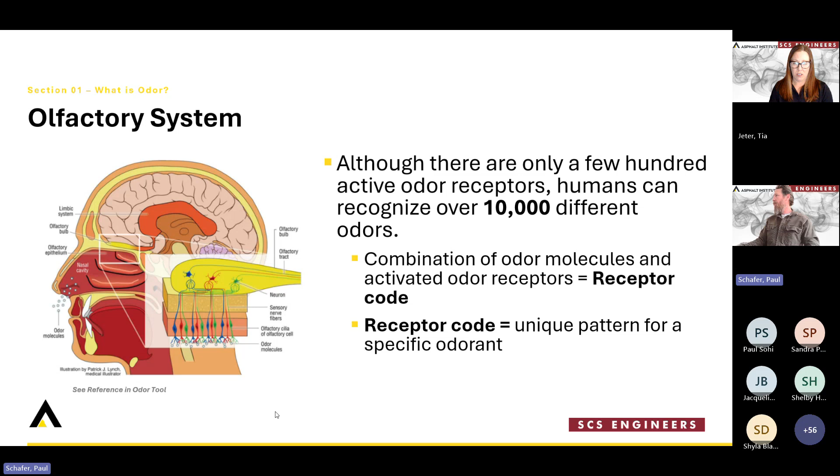So, what conditions are necessary for odor perception to occur? For one, there needs to be an odor-generating source present. The odorant molecule is generally a volatile compound. The odorant's molecular weight is less than 300 Daltons. This is some detail you probably won't need, but we're just providing that information. This information is in the tool. The odorant's vapor pressure is greater than 0.01 kilopascals at 20 degrees Celsius, and the odor molecule has a moderate to high hydrophobicity, so somewhat hydrophobic.

All right, so the mixture effect. So what happens when different odoriferous compounds are present at the same time?

So some olfactory neurons only respond when two or more odorants are present. For example, compound A, no odor detected. Compound B, no odor, but when you have compound A and B together at the same time, an odor is perceived. So that's considered the mixture effect.

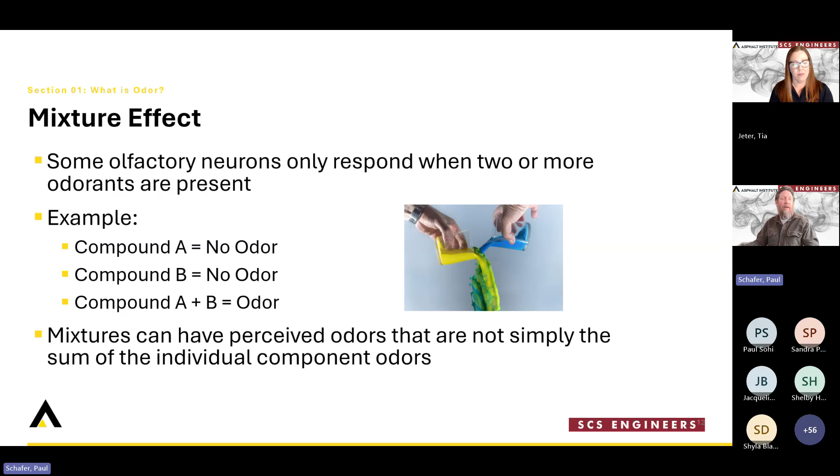Mixtures can have perceived odors that are not simply the sum of the individual components of odors. So some mixtures can actually inhibit the perception of other odors, and some mixtures of compounds can actually increase the perception, or the sum of the parts is greater than the individual compounds on their own.

Okay, so how do we define odor? The main ways we define odor are within this table: odor characterization parameters. First off, concentration, a very important parameter regarding odor. Odor concentration is quantified by determining the amount of dilution required to bring an odorous air sample to a detection threshold. This is often called the odor detection threshold of a specific compound. The dilution to threshold of an air sample defines its odor concentration.

Intensity. Odor intensity refers to the perceived strength of the odor. A quantitative measurement of intensity requires comparison of the odor air to a standard. Typically n-butanol in odor-free air is the standard. A qualitative scale can also be used to describe intensity, with 0 being not perceptible to 6 being extremely strong.

Odor character. Odor character describes what the substance smells like. For example, fishy, hay, nutty oil, creosote, turpentine, all of these things are descriptions of odor character. Hedonic tone, essentially, whether or not it's offensive, the degree of unpleasantness of an odor.

It's a subjective judgment. Certain people, my wife, for example, love the smell of gasoline. Some people do not. We even have an employee within SCS that I work with directly who loves the smell of hydrogen sulfide. I think she's nuts, but she likes it.

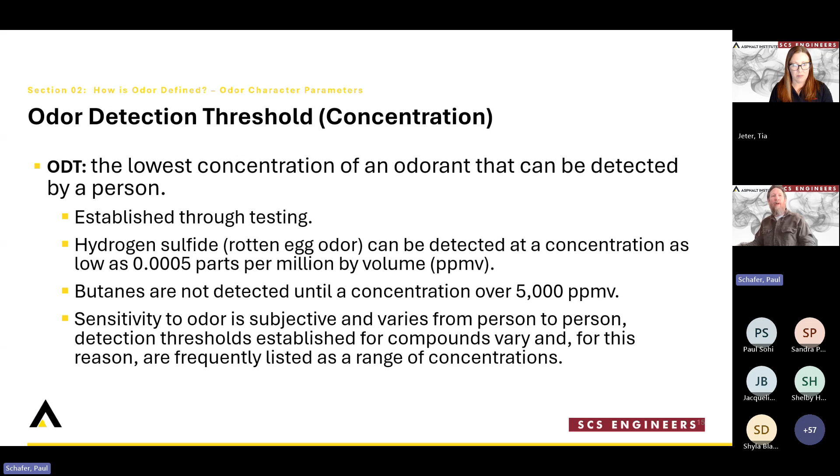Butanes are not detected generally until a concentration over 5,000 parts per million by volume. So certain compounds have significantly lower odor detection thresholds than others. Sensitivity to odor is subjective and varies from person to person. Detection thresholds established for compounds vary, and for this reason are frequently listed as a range of concentrations.

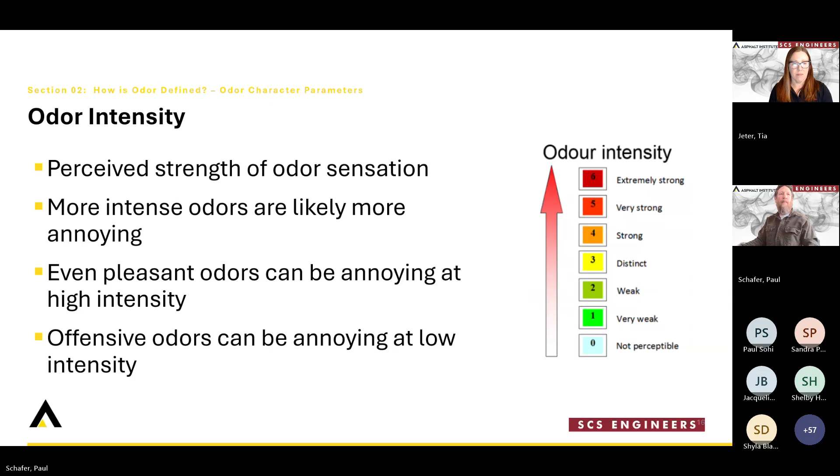So odor intensity, essentially the perceived strength of an odor sensation, is often described as 0 being not perceptible to 6 extremely strong. More intense odors are likely more annoying. Even pleasant odors can be annoying at high intensity, and offensive odors can be annoying at low intensity. So it's a combination of odor character as well as odor concentration that's in play.

Odor character, essentially what does the substance smell like? There are all sorts of categories of smells. The ASTM data series DS61 provides profiles of 180 different chemicals. Examples of descriptors, like we discussed before: fishy, hay, nutty. So this is a way of trying to establish relationships between potentially a source and the character being perceived downwind.

Hedonic tone, essentially how pleasant or unpleasant it is. It's influenced by subjective experience, like we discussed before, how frequent the occurrence is, odor character, odor intensity, and duration.

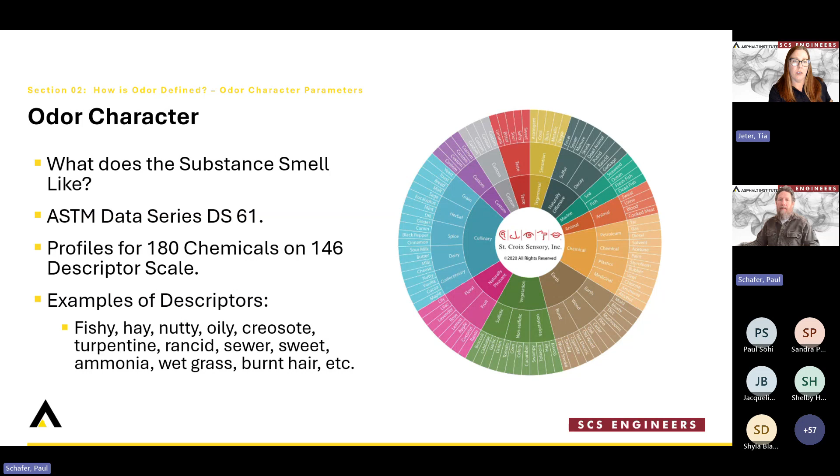Hey, Paul. Yep. I don't think your slide moved forward. Oh, shoot. Sorry. Thank you. You're good. There we go.

Hedonic tone. So it's influenced by subjective experience, odor intensity, and duration. Hedonic tone is influenced by all the other parameters and characteristics that we discussed. Some odors that are pleasant at low concentration can be perceived as not okay at high concentration. Baked bread smells good at low concentration, but some of the chemicals in baked bread smell essentially like vomit at high concentration. So that's an example of how hedonic tone can change with concentration.

Okay, so we're going to discuss some of the chemistry of asphalt odors now. What are the chemicals related to asphalt odors that can cause odor events? Hydrocarbons are one class of compounds, and the examples are on the right-hand side of the table. Oxygenates, including aldehydes, ketones, and esters. Nitrogen compounds: amines, nitriles. Sulfur compounds: mercaptans, thioethers, carbonyl sulfide.

Sulfur compounds generally have very, very low odor detection thresholds. Halogenated compounds: aliphatic compounds, chlorides, bromides. And inorganics. Hydrogen sulfide is an example of an inorganic. H2S has a very low odor detection threshold, able to be detected at very low concentrations.

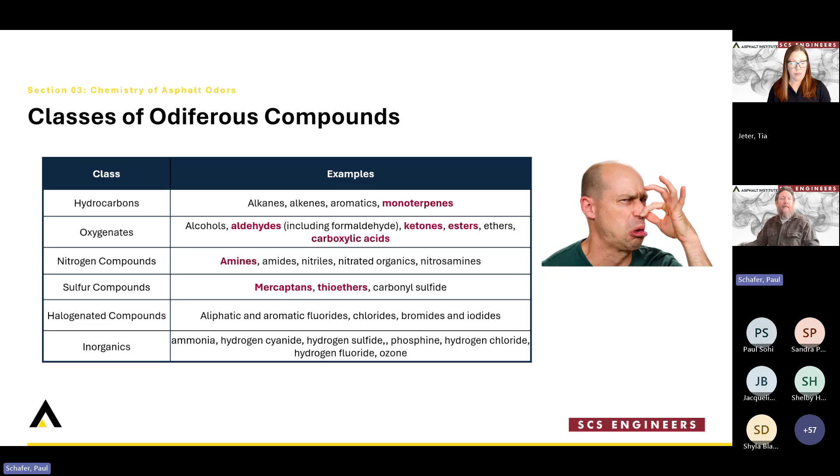Okay, so asphalt odors, some of the data we evaluated in development of the tools. So we looked at quantification of potentially odorous volatile organic compounds from asphalt binders using headspace. So Mr. Lang and his group put together a really quality description of asphalt emissions, and we utilized a bunch of that data, and we combined it with odor detection thresholds to determine which of the compounds have the highest potential relative to asphalt sources for generating odor and odor events. So what compounds had high odor potential?

For one, sulfur-containing compounds. So butane thiol, carbon disulfide, and you notice how we provide an odor detection threshold range, as well as the odor character related to that specific compound. The reason that we provided a range is that depending on the test method and the source, from ACGIH, American Conference of Governmental Industrial Hygienists, to EPA, 3M, various types of journals, you can find large ranges of odor detection thresholds specific to a compound.

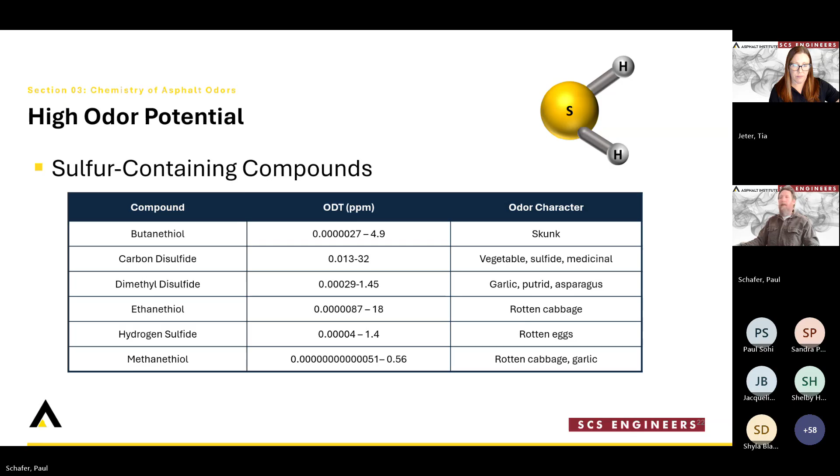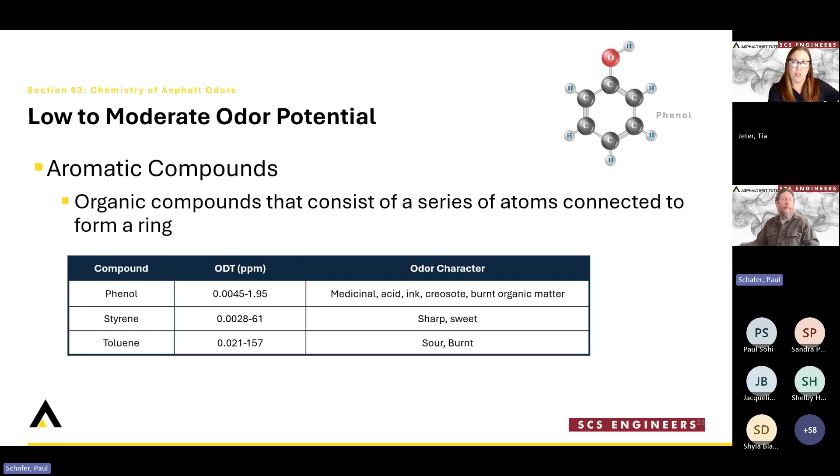All right, so aromatic compounds, low to moderate odor potential: phenol, styrene, and toluene. Some are listed at fairly low odor detection thresholds, but in general, compared to thiols, mercaptans, and sulfonated compounds, a much more moderate to low odor potential related to these compounds. And then the compounds that may exist in high quantities, but potentially aren't a major source of your odor profile or what would cause odor events, are 1,3-butadienes or aliphatic compounds and fluorinated compounds. Essentially because these compounds have significantly higher odor detection thresholds than compounds listed before.

So potential asphalt odor sources, and I believe Tia, you're taking over from here. Yes. So I will touch base on a few of the common sources we find in the asphalt industry where you could maybe produce odors. So the first one we have here is your asphalt loading, unloading, and storage.

So as this cartoon depicts, as you load liquid into a vessel, whether that's a storage tank or maybe you're loading into a truck, you're displacing the vapors that are in that vessel and pushing them out of some sort of vent, could go on a stack. Wherever those vapors are emitted is a potential source of odors that will be released to the atmosphere. We have seen in some cases these storage tanks, especially in a big facility, are controlled by maybe a flare for some facilities like refineries. Maybe it's a mist eliminator. So there are certain controls that can reduce these odors out of these stacks. Or in some cases, it could just be an open vent.

We did testing at a facility where they were actually unloading a truck of hot asphalt. And in the process, before they start pumping out of the truck, they open a vent on the truck. That way you avoid pulling a vacuum and crushing it like a can when you turn your pump on. And there are 2 to 5 minutes between when that vent is opened before the pump starts that you have hot asphalt and visible fumes and odors that can escape through that vent. So these are sources that sometimes are controlled, sometimes they're not. Typically there'll be an intermittent odor source. So it really depends upon the frequency you're receiving trucks or loading to a tank.

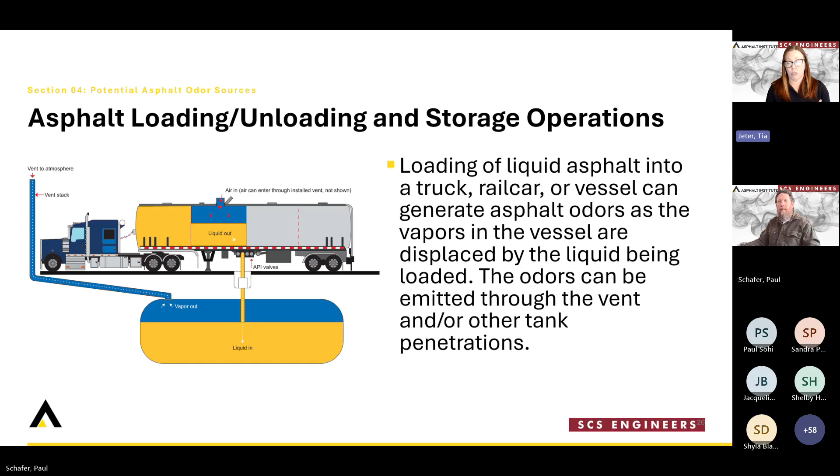Asphalt mixers. So most of you are familiar with this industry. These mixers are used to combine liquid asphalt with many types of different compounds. It could be aggregates, for paving. It could be additives to make a different type of coating, recycled materials. But generally in these mixers, you're tumbling around the asphalt, agitating it at pretty high temperatures, which does create the potential for asphalt fumes or odors.

These are common at hot mix asphalt plants, cements and coating facilities, shingle production plants, terminals. They all may have these mixers there. Again, these may commonly be going through some sort of an air pollution control device. And in some cases, if that air pollution control uses a form of incineration or like a thermal oxidizer, you could get fairly good odor control on this source. If it's a mist eliminator, you may not get as good of an odor control. And if it's not controlled, then it's definitely going to be a pretty strong source of odors.

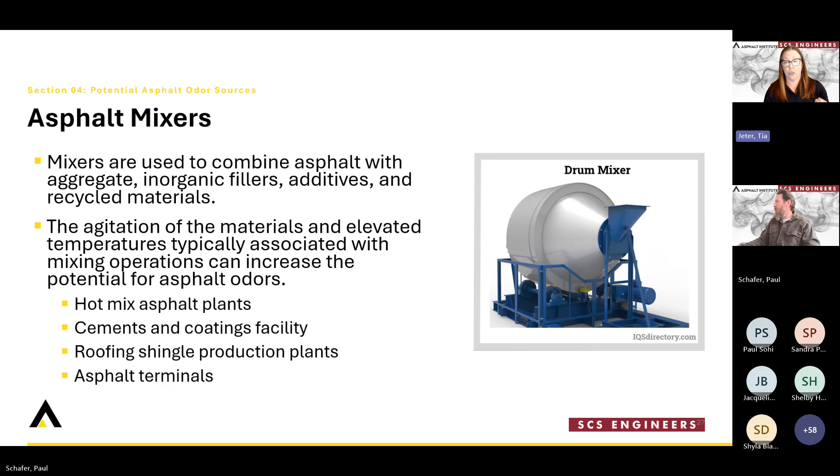Asphalt saturators and coaters. So coaters, this is where you're applying the asphalt to a substrate, typically a fiberglass mat. Frequently you'll see these at shingle production lines. You do have kind of an open vat of hot asphalt, which has a potential to generate fumes, which would release odors. Sometimes the issue with these coaters, it can be hard to enclose them completely and try to capture those emissions and control them in some way. This is kind of inhibited because you have to get that substrate, it has to go in and out of the coater. So totally enclosing that can be challenging.

So sometimes these coaters are a source of our fugitive odors. And we'll talk about that on another slide, but you might have a fugitive odor source within a building. And then you're further looking at how you control that building. Saturators are another common source we see in the asphalt industry that can be a source of odors. There's typically a large volume of asphalt in a saturator, which is why it can be something to be mindful of.

They are frequently controlled though, and they are frequently controlled oftentimes by some sort of a control that uses incineration or oxidation. So while it's being controlled by that type of a control device, your odor risk is probably pretty minimal. The things I would be cognizant of is if you have a malfunction of that control device or downtime. If you have an uncontrolled saturator, it's a high volume of asphalt at high temperature with the potential for an odor episode to occur if you have no control.

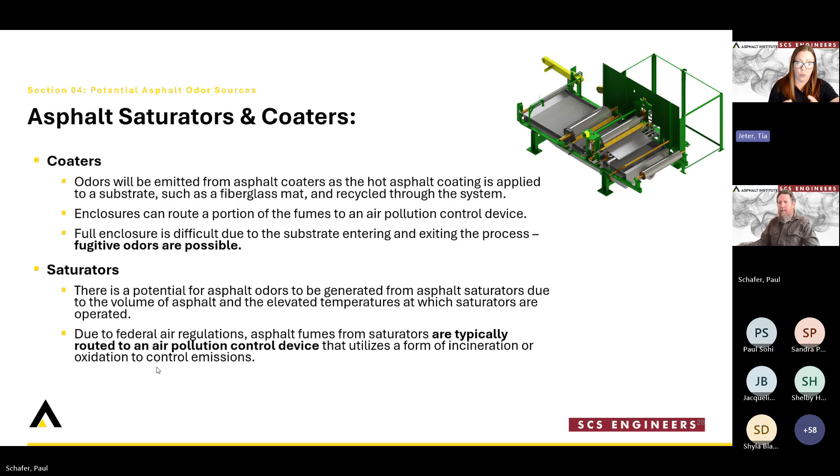Asphalt applicator. This could be surface application, whether you're paving a road, or this could be application of asphalt to, say, some sort of a sheet, like a laminate or sealant applicator in roofing manufacturing, or you could be applying to like a roofing underlay. You might have some sort of an asphalt application on that. All of these are opportunities for asphalt fumes and odors to be generated. The level of perceived odor is typically impacted by many factors, some of which we kind of talked about here. The temperature of the asphalt: typically the hotter the asphalt, the more potential to volatilize these compounds that can be considered odorous and create potential for odor.

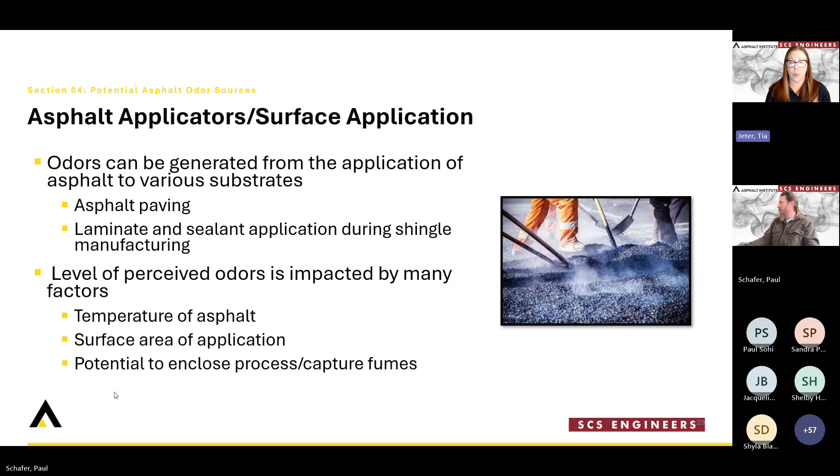The surface area of application obviously impacts; the amount of asphalt and the surface area would increase odor. And then the potential to enclose it. Obviously, you're probably not going to be enclosing a road that's being repaved to try to control those odors, but we could try to enclose a laminate applicator or sealant applicator, and transport those odors to some place where it can be either reduced, or maybe you emit it at a higher release height through a stack to try to reduce ground level impact. So there's ways to try to mitigate some of these sources.

Asphalt oxidizers, also called a blow still. If you're not familiar with this, in a blow still, you're bubbling air through liquid asphalt in a process vessel. Basically, you oxidize the asphalt, and it changes the softening point and penetration rate of the asphalt. Odors can be generated in this process. You are bubbling air through liquid asphalt, so you're kind of increasing the potential to volatilize or move some of these compounds into an airstream that could potentially be emitted.

Ideally, by regulation, most of these blow stills are controlled, again, through probably some sort of incineration or oxidation. While that control device is operating, you probably have a low odor risk. If you have a malfunction of that control device or downtime where you have a blow still operating without control, then you would have a potential for an odor risk to occur during those moments.

And then odors from other air pollution control devices. So I kind of hit on incineration, combustion. Those do a pretty good job of breaking down most odorous compounds to less odorous compounds and reduce odor risk. But there are certain controls that don't necessarily do that.

So one, mist eliminators, these are also called coalescing filters or candle filters. They're commonly used in the industry to control asphalt fumes, and they primarily work by controlling particulate matter. So you're basically filtering the fumes through filters, and the PM or the particulate matter sticks to the filter, and then you have cleaner effluent leaving the vessel. So you can see some reduction in odor if you have a mist eliminator that's being maintained and properly cleaned, where you have captured some of those particles on your filter that's reducing the odor that leaves.

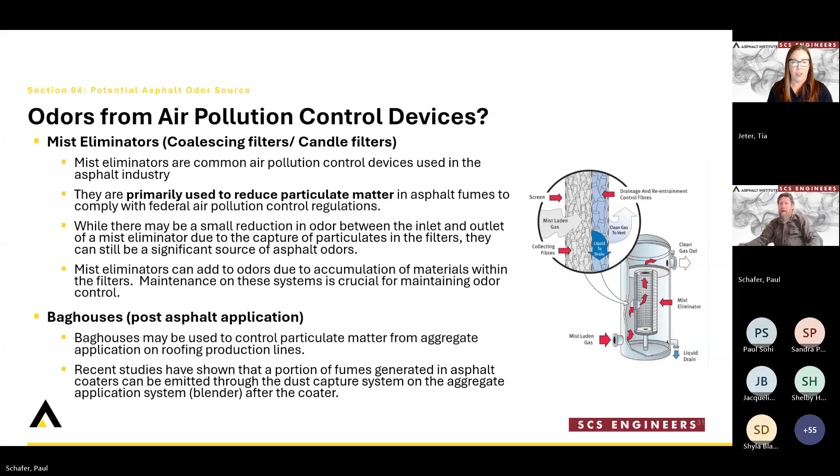Fugitive odors, and I think this is my last slide on sources, is another one, and you'll see it at many types of facilities. So the first one I talk about is building fugitives. This is if you have a process that's inside, could be a shingle production line, could be a coatings and cements facility, or anything inside a building, and you have odors being generated inside the building. The building then becomes a fugitive source of odors, where these odors may be emitted through a fan, like a wall fan, or when somebody opens a door.

Some of these materials or processes are very hot. So in the summertime, these facilities like to open big garage doors to let air through. It's more comfortable for employees. By doing this, however, you've created a new pathway for odors to escape and move away from the facility through these doors. So we can see fugitive odors from these buildings, and they can be a large volume of air to try to control or reduce. So it can be challenging to build a profile on how we reduce those odors. Other fugitives we see are just process fugitives.

These I would refer to as if you have a refinery or just any enclosed piping where you're moving hot asphalt from like a tank to another vessel. You have fugitive losses through valves, flanges, pump seals, like any other fugitive loss. The odors will escape through those. Facilities can have LDAR programs in some cases if they want to try to reduce that, but it is a source of odors, and something that some facilities like to think about how to manage if it's potentially causing a downwind impact.

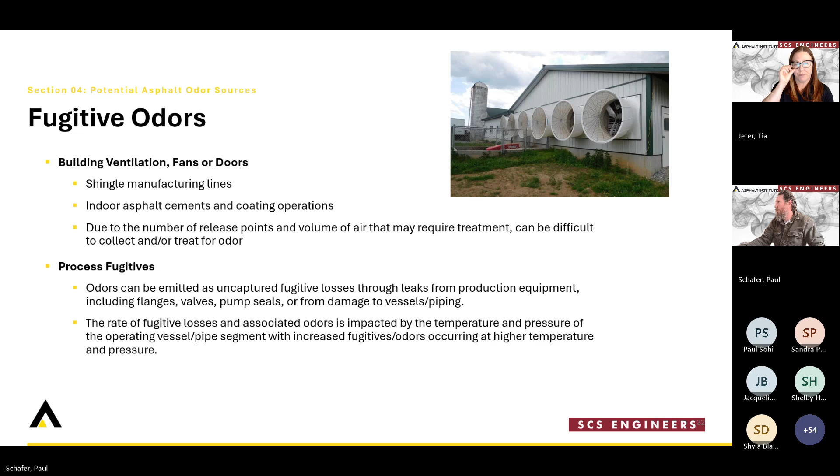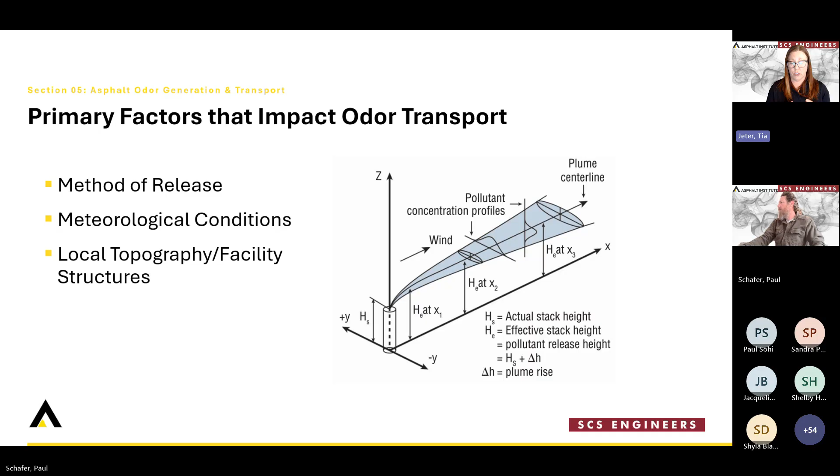All right, so that was some of the sources we see potentially generating odors in the asphalt industry, and now we're going to talk about how those odors are transported or move away from your facility. So primary factors that impact odor transport are very similar to any other air pollutant. If you've ever done dispersion or transport of any other air pollutant, the method of the release is an impact. The meteorological conditions at the time of release, as well as the local topography and facility structures, can impact how that odor will be transported from your facility.

So method of release, you have your odor emission rate. This is a function of the concentration of odor in the stream and the volumetric flow rate. You have to consider both because you could have one stack with a really high odor concentration, but if it's a super low volume, it may not be that impactful. Conversely, you could have a stack with a low odor concentration, but a very high volumetric flow rate that could cause a problem. So you look at both as your odor emission rate.

The release velocity looks at the potential for mixing and dilution. So ideally, the faster something leaves a stack or a fan or a vent or a door, the better potential it has to mix and dilute with the air, which can reduce the odor concentration that somebody downwind could perceive. So mixing and dilution is a good thing when we're looking to reduce odor. The orientation of the release: is it a vertical release or a horizontal release? Vertical would most likely be a stack, or it could be a fan on top of the building. Horizontal would be like a wall fan that blows horizontally out the building, or maybe it's just a door that's open and odor's meandering out horizontally. Ideally, vertical release will get more mixing and dilution than horizontal.

The release height also impacts the potential for mixing and dilution with air. The higher the release, generally the better chance you have of that odor diluting and mixing before it gets to the ground. So higher is better, generally speaking. Similar with release temperature, the hotter something is, the more buoyant it is. That buoyancy gives you an additional effective vertical release that can help increase the likelihood of mixing and dilution, which is a good thing for reducing odor.

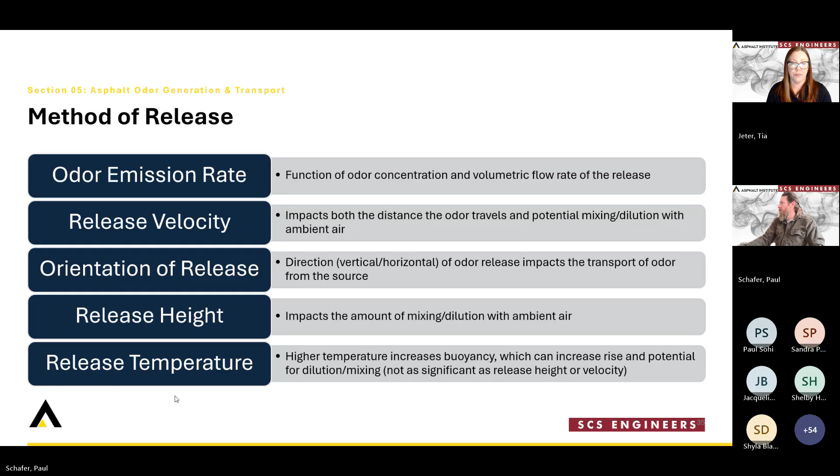Your meteorology obviously plays a big impact on that potential for mixing and dilution. So wind speed, higher wind speed creates more mixing. Low wind speeds are generally when you're going to have a higher risk of offsite odors downwind from your facility. The wind's not really moving, it's not mixing, it's just kind of low and slow, and so you could have higher odors perceived downwind. The wind direction is also obviously very important to tell us which way it could go.

So direction obviously plays an important role in where the odor may transport to, and the atmospheric stability has to do with the vertical movement of the atmosphere. Less stable generally means more mixing and diluting. The more stable an atmosphere is, it doesn't mix, and so there's more potential for odor.

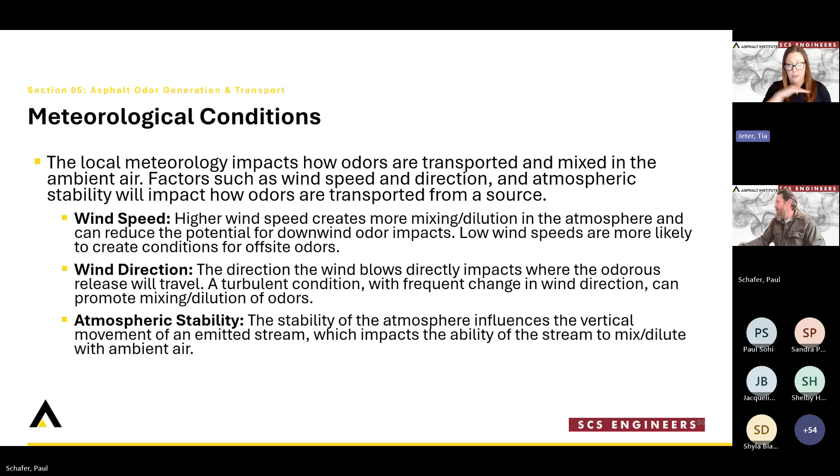And topography or facility structures. So the topography affects how the wind will move. If you're in a valley, it may dip down if it's a heavier air. And it also impacts the surface roughness. So if you think about like an open field, like a soccer field, the wind can blow just straight across the field, doesn't mix a lot. If you take that same field, planted a bunch of trees, now that wind has to move around all the trees as it's blowing through, and you get more mixing and dilution. So it all kind of plays a role in how the odors can transport from your facility.

We also see this with structures. This could be a building, it could be a large storage tank. If you have a stack next to a building and the wind blows over the building, you get this wake on the downwind side of the building where the concentration gets pulled down to the ground because there's a lower pressure on the back side of the building, and that can increase the ground level concentration on the back side.

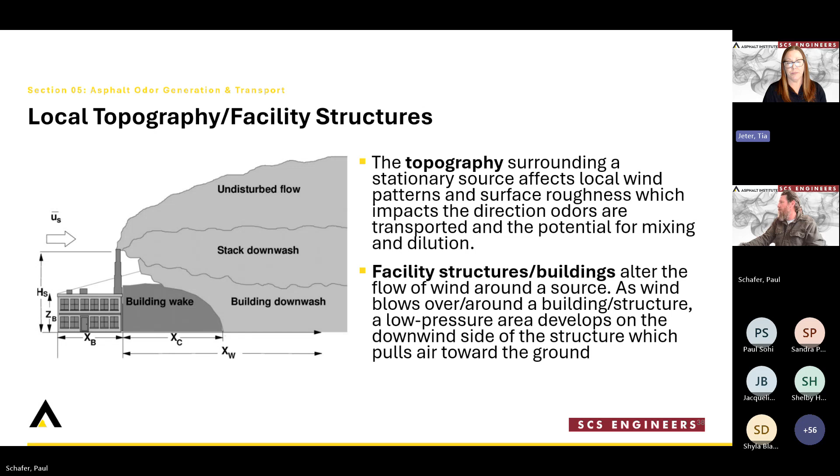And that was kind of how odor is transported. Very high level, very, very brief touch on how the odor can move from your plant. We kind of touched on the chemistry of asphalt, what sources in the asphalt industry are creating odors, and what odor is. So we have some future webinars coming up.